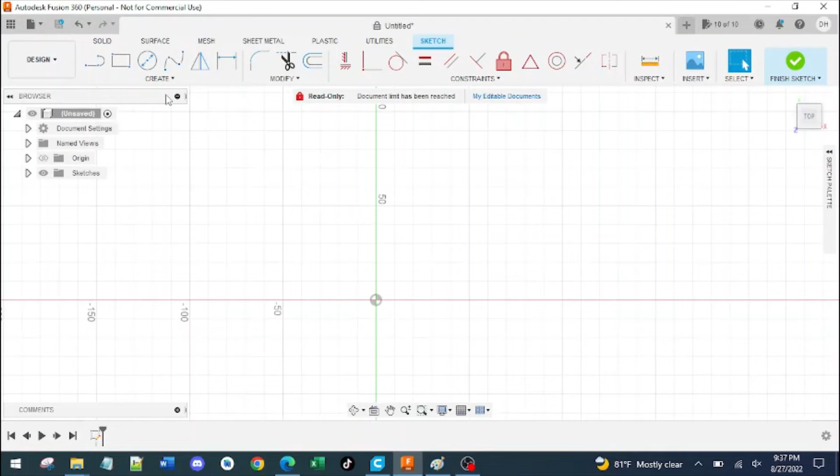So first we're going to create a sketch. And just for simplicity's sake, we'll just create a rectangle and then add some text into that rectangle. Go ahead and drag and drop, spell out something. For this instance, we're going to go with the word hello. I'm going to make it a little bit bigger, make it 10 millimeters just so it sticks out a little bit more.

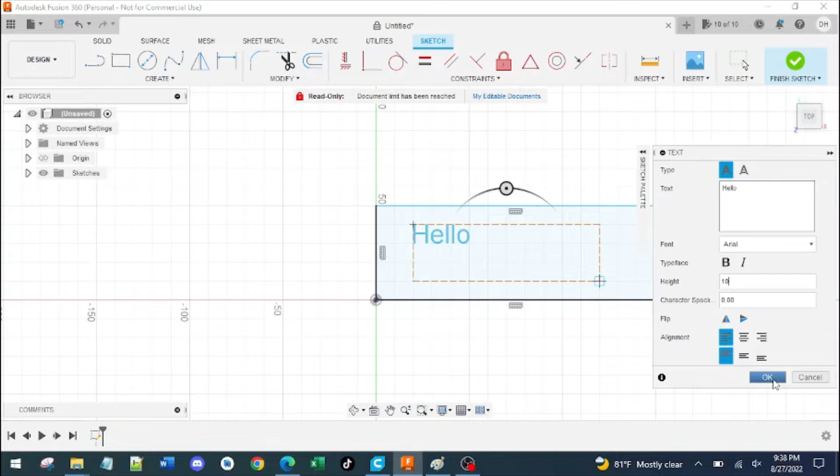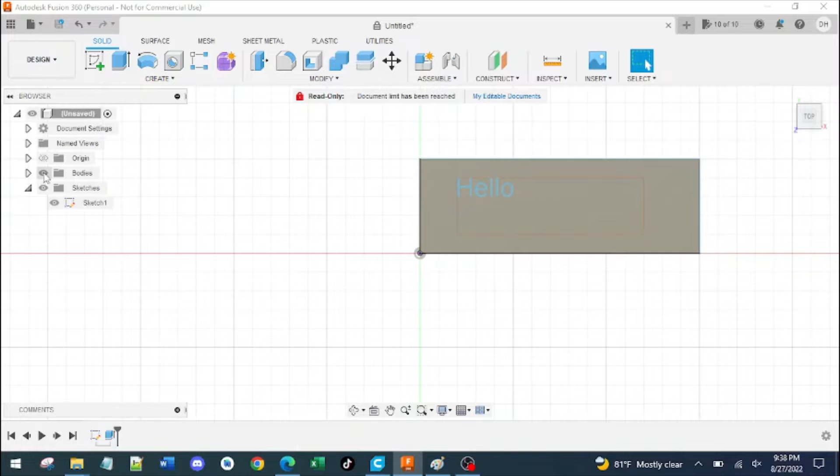Now, from there, what we need to do is extrude, which means give it a little bit of depth, right? So we're going to make the base of this 2 millimeters, so that way we've got some room to go in. And then we're also going to make the characters, the letters of hello, 3 millimeters. What that'll do is allow us to have that sticking out just a little bit above the body. Now you want to join the body of the rectangle and the characters together so it creates one body.

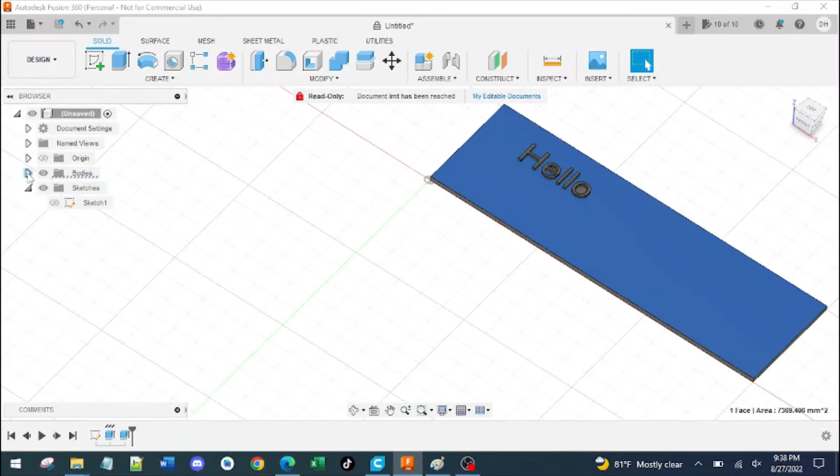Now what we want to do is be able to separate the word hello so we can capture that size without modifying it in the future. So we need to split the word that is sticking out above the flat from the actual remainder of the thing. So go ahead and construct an offset plane, and now we're going to separate the bodies. So you go to modify and then split body.

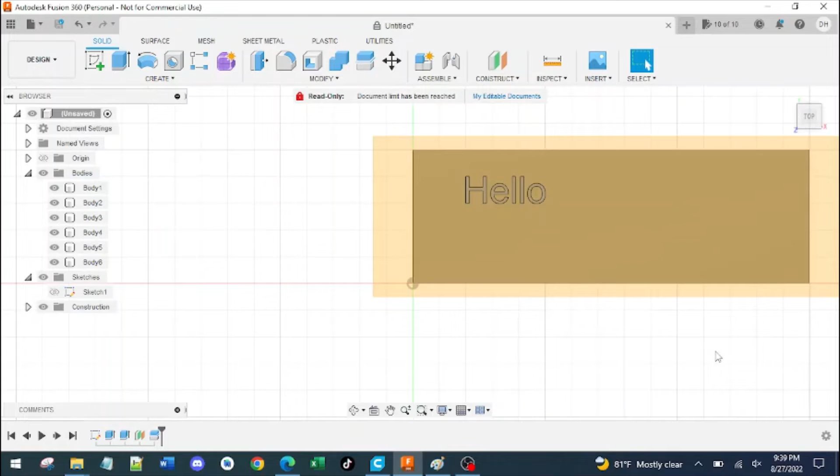The body to split will be the only thing to choose, and then the splitting tool will be that offset plane that we created. You click OK, and it creates each one of the characters that are above that offset plane as a separate body. So now you got bodies 2 through 6 that are the letters hello. What we're going to do is highlight those, tap M for move, create a copy of it, and drag that off to the side.

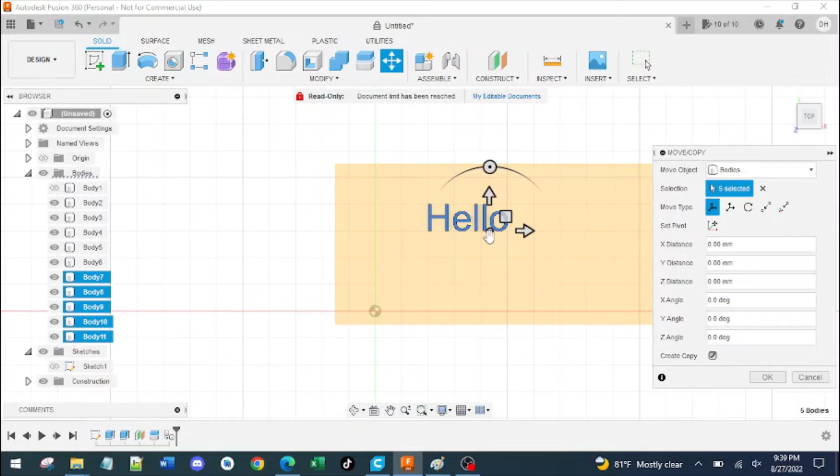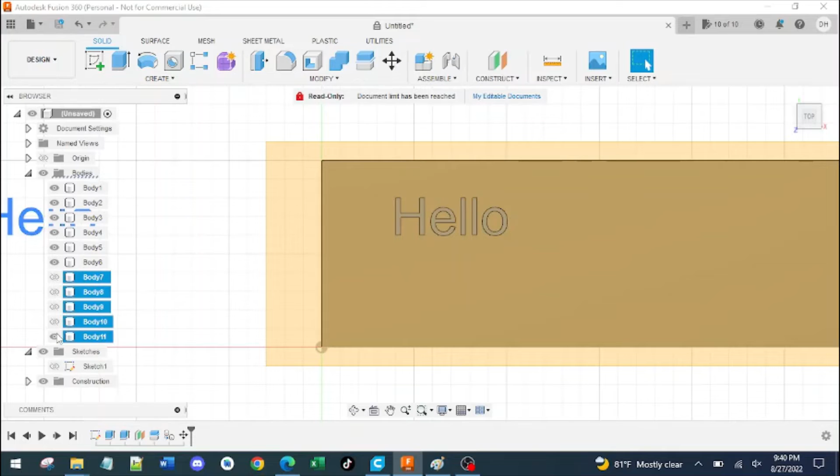Now what this will do is allow us to retain the original size hello, while when we go into the actual body where we will insert it, we can mess around with those tolerances and make those a little bit larger, so when we print the hello, it will snugly fit into the actual body, the rectangle that we're modifying.

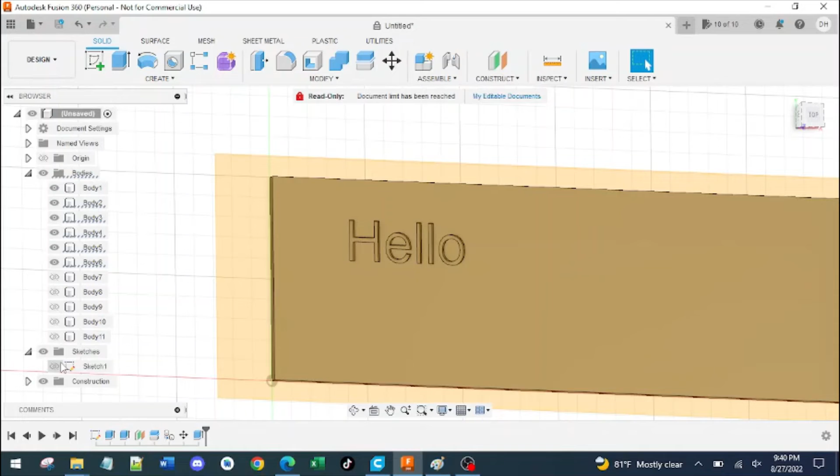Now we're going to go back into the rectangle and modify the hello to create an inset for us to drop those letters. So we're going to extrude that down -2 millimeters, and it's actually going to cut a little slot for us to stick our letters inside that rectangle. Now if we were to print hello and this rectangle at the same time, the letters would not fit at all because they are perfectly sized.

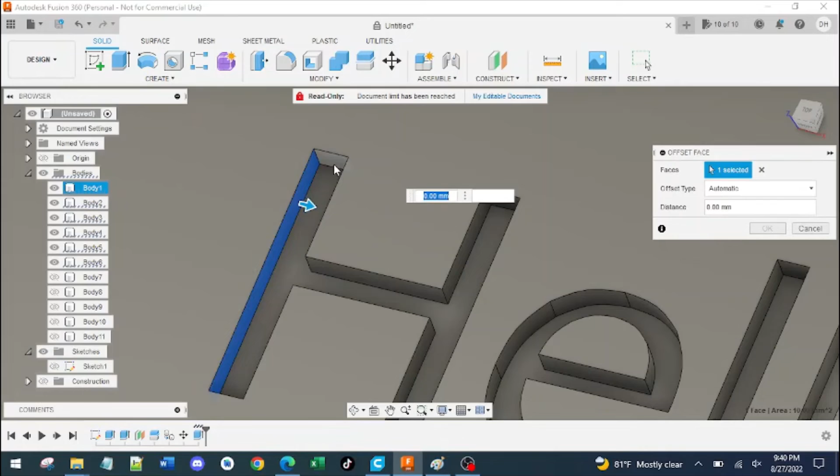What we need to do is create a little bit more tolerance to let the characters fit inside this. So we hit the letter Q for press-pull, and we select every single face. Now for time's sake, I'm only selecting a few of them. Now what I do for these is 0.3. So I do -0.3, and that will open up those tolerances just a little bit to allow us to drop those characters in and snugly fit them.

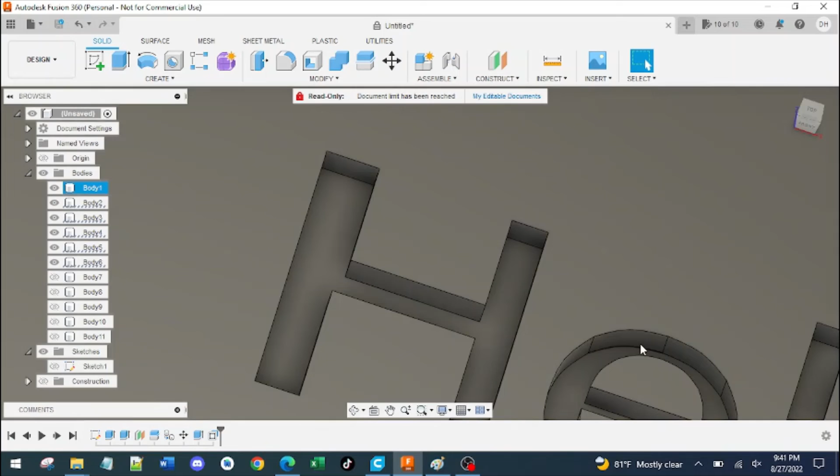Usually it's between 0.3 and 0.2, and it will drop in and fit, like press fit. So you shouldn't need any adhesive, but you might, but that's how it works. From here, you extrude the hello to add a little bit more depth to have it stick out past the rectangle just a little bit, and then you drop them both into your slicer of choice, give it a print, and see how it works.